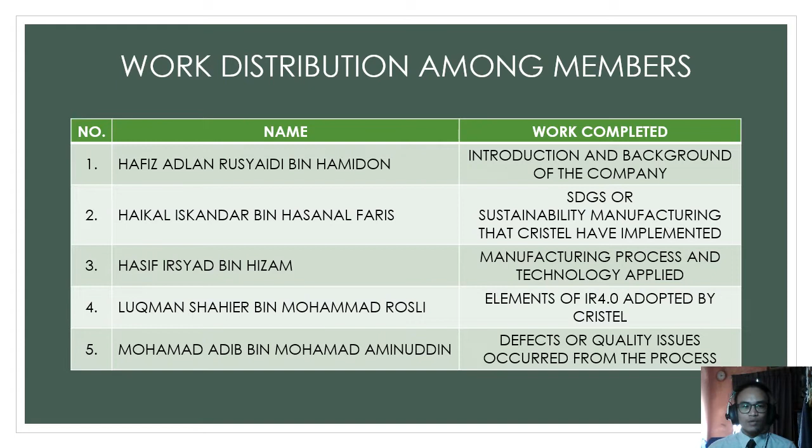Next, I would like to explain the work distribution among members. Me, Hafiz Adlan Rusyaidi have done the introduction and background of the company. Haikal Iskandar did the SDGs, or Sustainability Manufacturing, that CRISTEL company has implemented. Hasif Irsyad did manufacturing process and technology applied by the CRISTEL company. Luqman did the elements of IR 4.0 adopted by the CRISTEL company. Lastly, Mohammad did the defects or quality issues occurred from the process.

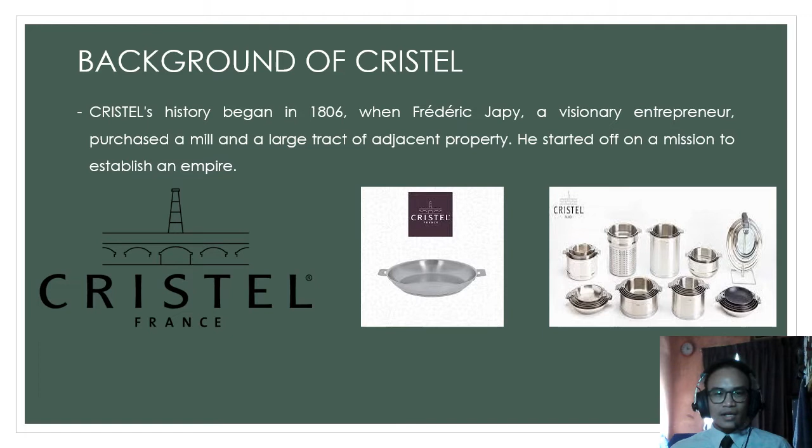First and foremost, before we start everything, we need to know the introduction and background of the company. The company that we have chosen is CRISTEL. CRISTEL's history began in 1806 when Frédéric Japy, a visionary entrepreneur, purchased a mill and a large tract of adjacent property. He started off with a mission to establish an empire. This is the logo of CRISTEL, and this too is an example of a product that CRISTEL has manufactured.

Frédéric Japy revolutionized clock production within a few years by introducing contemporary machinized procedures. He invented machines and patented them. Additionally, he organized other workshops throughout the region. Following this initial phase of rapid expansion, he rationalized his manufacturing unit and chose to make the Fesches-le-Châtel facility his flagship location. When he died in 1812, he left the company to his three sons, who helped the business expand and develop new facilities.

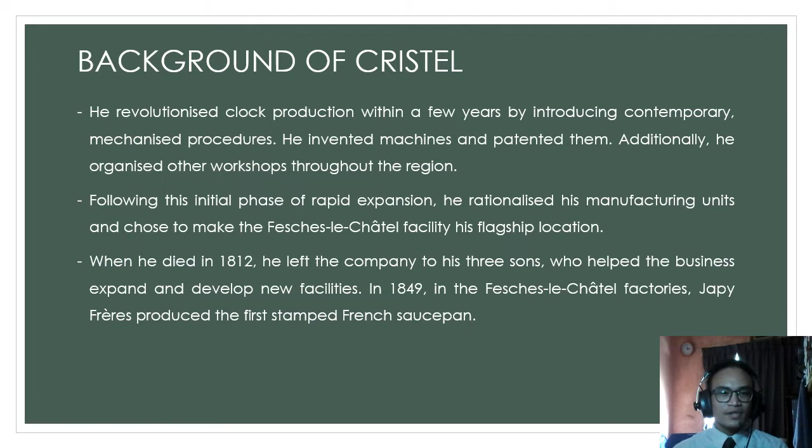In 1849, at the Fesches-le-Châtel factories, Japy Frères, produced the first stamped French saucepan. During the Second Empire, Japy grew to be France's second largest industrial enterprise. The 1880s were a golden age for this rapidly expanding company, which achieved additional success with typewriters, coffee grinders, garden furniture, and light fittings, among other products.

Since 2018, CRISTEL, the market leader in France for high-quality stainless steel cookware, has been a partner of the French Association of Master Restaurateurs, with recognized 3,800 culinary enterprises around the country.

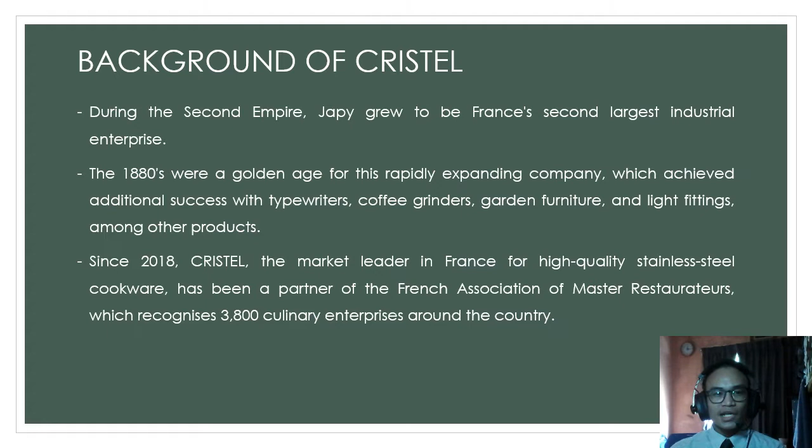CRISTEL's four primary collections are OFG (Origine France Garantie), is certified by Veritas. The raw materials utilized to manufacture CRISTEL products are of the highest quality, ensuring complete food neutrality. CRISTEL uses a non-stick coating in CRISTEL products in France, which is guaranteed to be free of PFOA. Lastly, CRISTEL has developed a line of eco-friendly professional grade cleaning products known as RENOX.

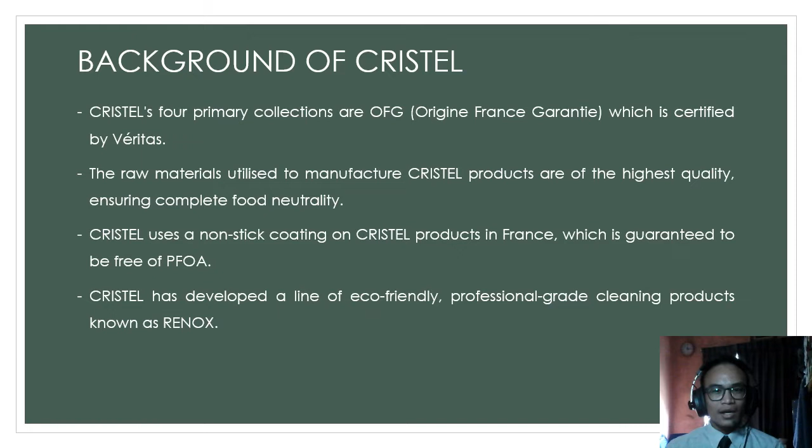Next, I would like to pass on to Hasif to explain further details on the manufacturing process of the CRISTEL company's products and the technology applied in manufacturing the product. Thank you, Adlan, for your explanation. Assalamualaikum warahmatullahi wabarakatuh, my name is Hasif. I want to continue our presentation with the manufacturing process and technology applied in this company.

For steel part production process, the first process is hot rolling. Hot rolling is a metal working process in which metal is heated above the recrystallization temperature to plastically deform it in the working or rolling operation. This process is used to create shapes with the desired geometrical dimensions and material properties while maintaining the same volume of metal.

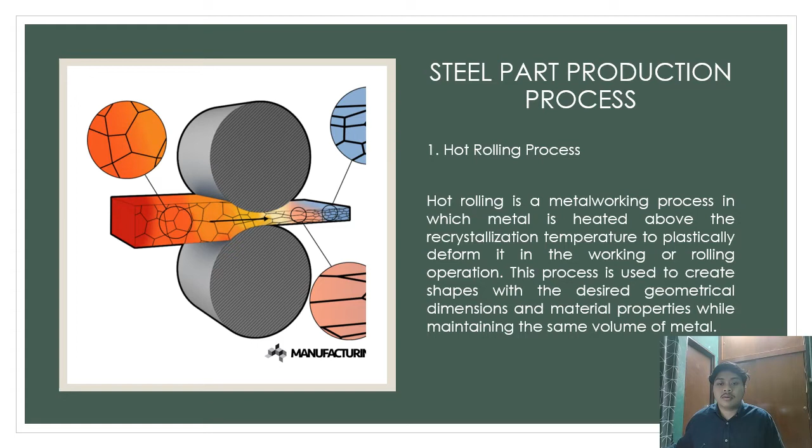The second one is the blanking process. Blanking is a steel manufacturing process in which a flat geometric shape is created by feeding a coil of sheet metal into a press and die. In this process, the blank is punched out from a large metal sheet.

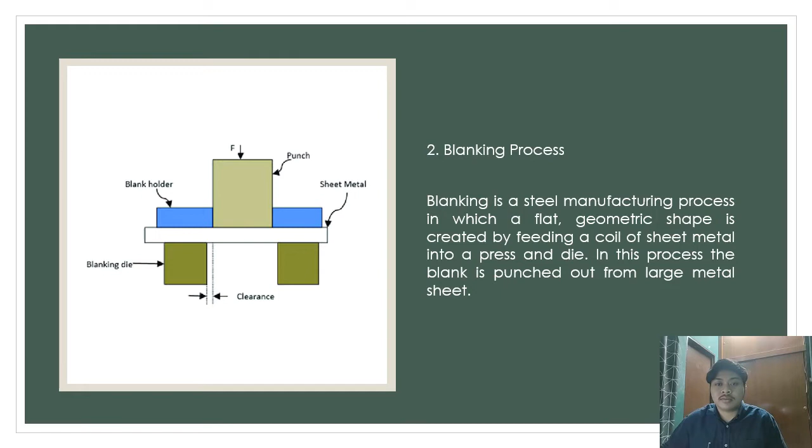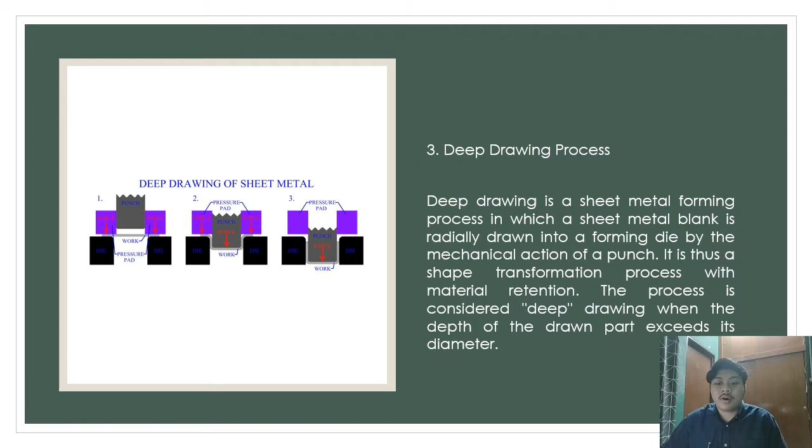For the third one is the deep drawing process. Deep drawing is a sheet metal forming process in which a sheet metal blank is radially drawn into a forming die by the mechanical action of a punch. It is thus a shape transformation process with material retention. The process is considered deep drawing when the depth of the drawn part exceeds its diameter.

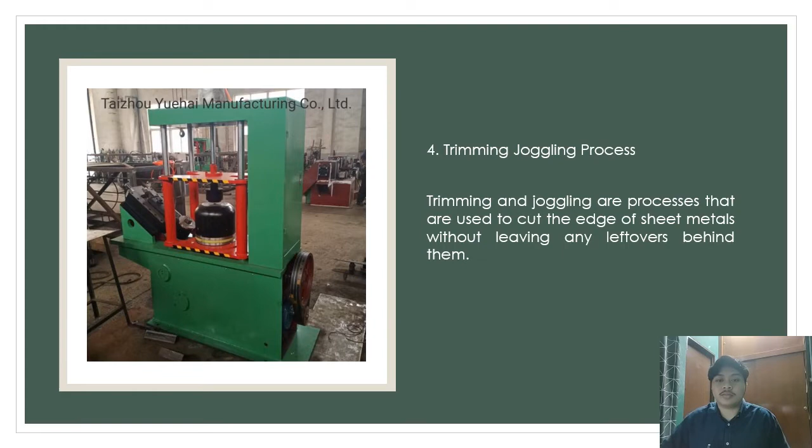The fifth process is heating. Heating is a series of industrial, thermal, and metallurgical operations used to change the physical and chemical properties of a substance. Annealing, case hardening, precipitation strengthening, tempering, carburizing, normalizing, and quenching are some of the heat treatment procedures used in metal fabrication.

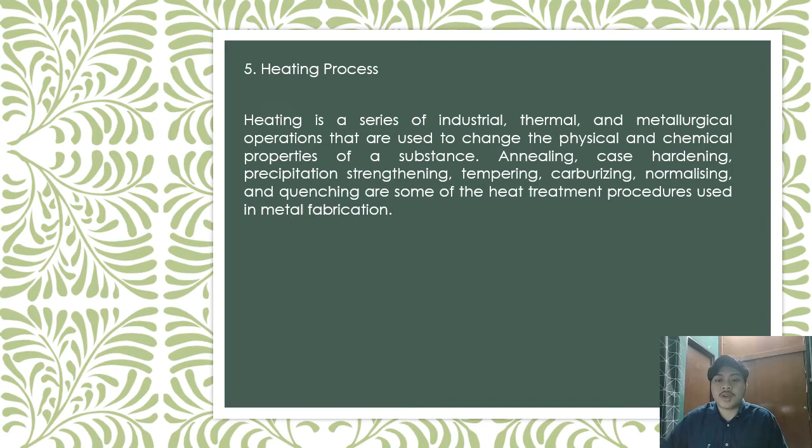Number 6 is the friction press process. Friction press is used for great forging accuracy, achieved because of the free stroke. This is the friction press machine.

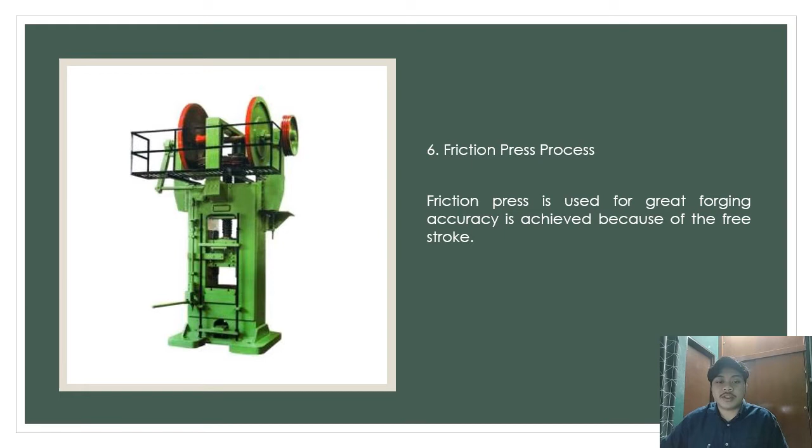Lastly, for steel part production, the process is polishing and grinding. Grinding is the first stage in the removal of mechanically attached material. Grinding is used to remove damaged or distorted surface material from a surface of the product.

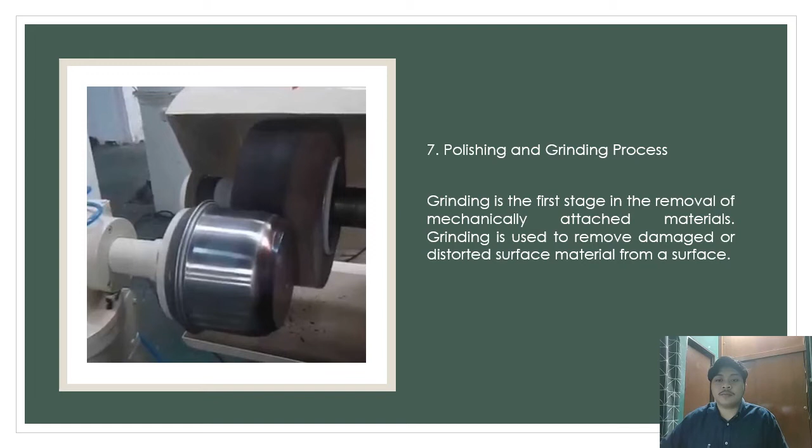For the next part is the plastic part production process. The first process is injection molding. Injection molding is a method to obtain a molded product by injecting plastic material, molten by heat, into a mold, then cooling and solidifying it.

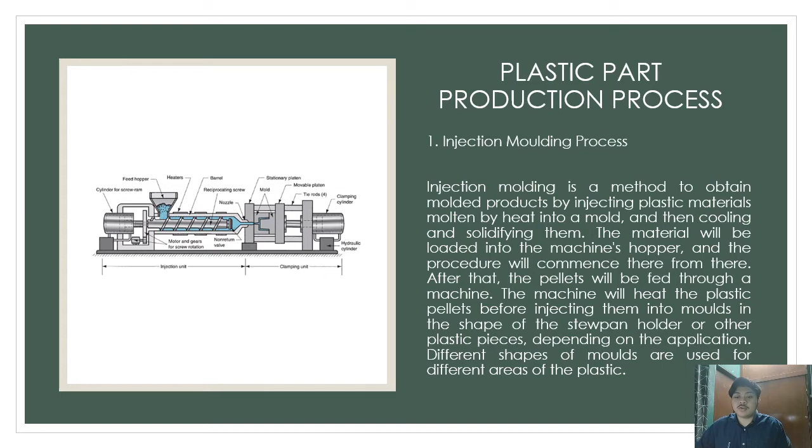The material will be loaded into the machine hopper and the procedure will commence from there. After that, the pellets will be fed through the machine. The machine will heat the plastic pellets before injecting them into a mold in the shape of a stewpan holder or other plastic pieces, depending on the application. Different shapes of molds are used for different areas of the plastic.

The last part is the riveting process. Riveting is a forging process that may be used to join parts together by way of a metal part called a rivet. The rivet acts to join the parts through adjacent surfaces. A rivet can withstand higher temperatures that can burn grime onto or near the rivet head.

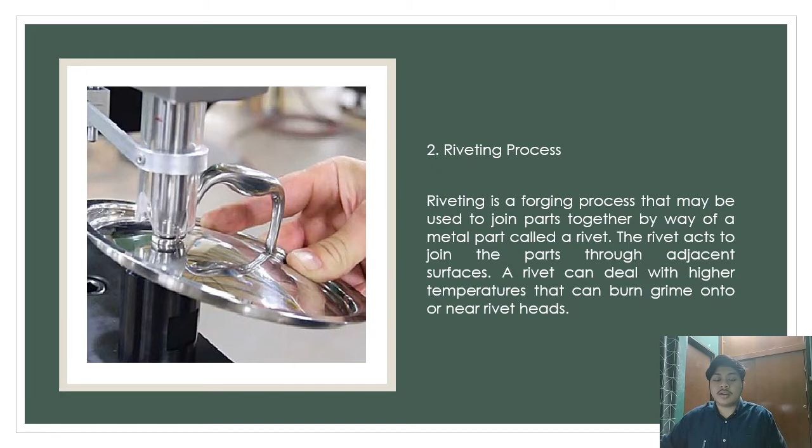So that's all from me for explaining the manufacturing process and technology applied in this company. Thank you.

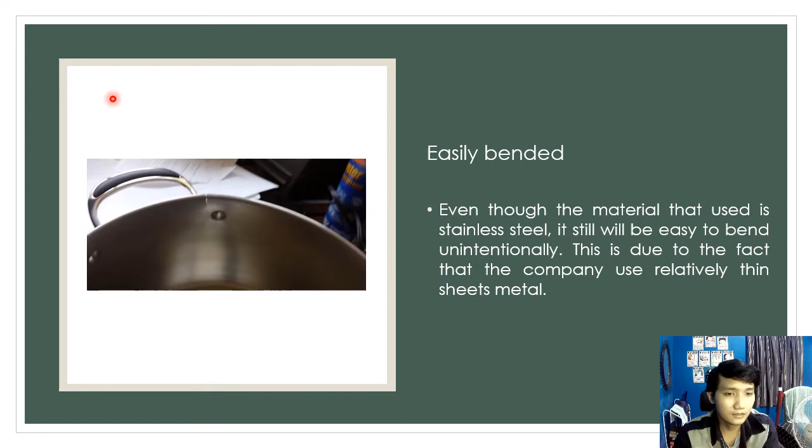The first defect we can find in this product occurs during the hot rolling process. Surface imperfections on strips during the hot rolling process can have a significant impact on the rolled product quality. On continuous casting slabs, there are early faults that spread and are inherited from those on the surface of rolled steels during upstream rolling processes.

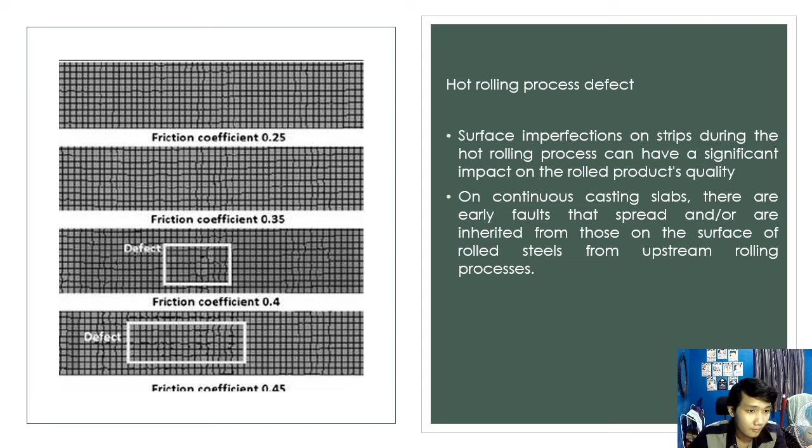As you can see from the picture, when the friction coefficient increases, the defects appear more and more. As you can see from the picture, this is the defect.

For the blanking process, the defects that can occur are scratches, rolling marks, and scoring. The plate will be damaged when dragging it back and forth on the lower mold, and this kind of scratch is deep and not easy to polish off.

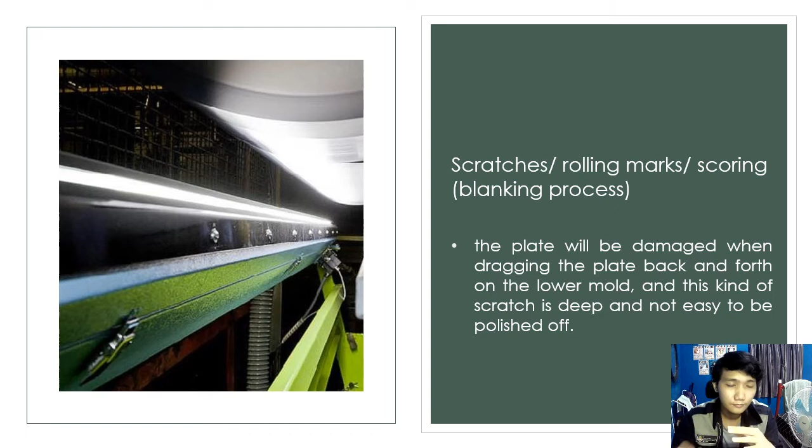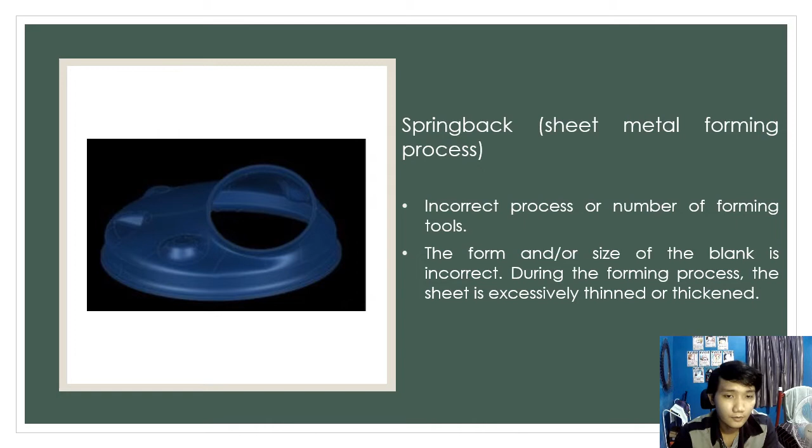Another defect that can be found is springback from the sheet metal forming process. It is caused by an incorrect process or number of forming tools. Another cause can be that the form and size of the blank is incorrect. During the forming process, the sheet becomes excessively thin or thickened.

For the heating process, the defects that can happen are overheating and burning. Improper hot working of low alloy steel reduces the ductility of materials, with faceted fracture surfaces and rendering them unsuitable for practical application. As shown in the picture, it demonstrates that the ductility of the materials will reduce when overheating occurs.

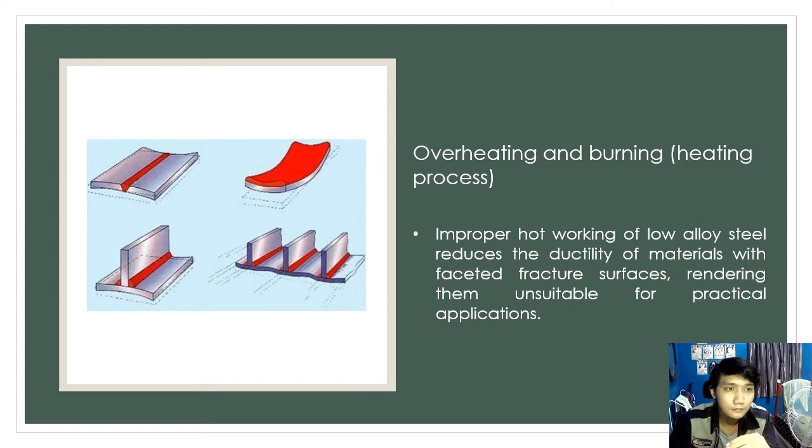For the friction process, the defect that can occur is hooking. Hooking defect creates a crack initiation and therefore reduces the fatigue resistance. Hooking is a defect that is more likely to occur in friction stir welded lap joints. It appears exclusively in the TMAZ next to the weld nugget and may not present in the HAZ where no plastic deformation exists.

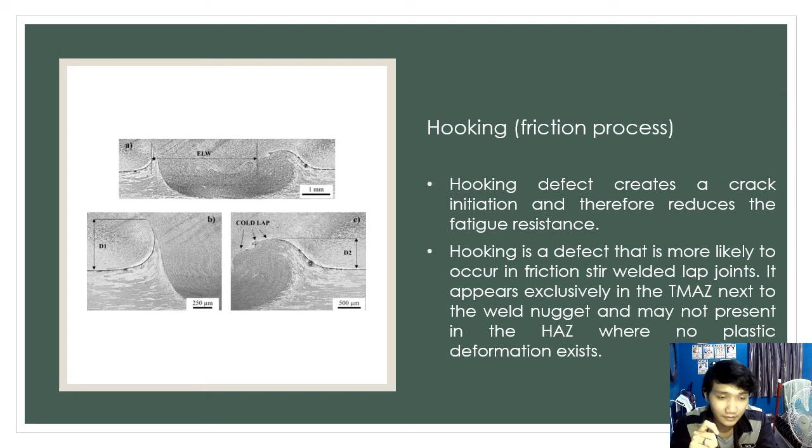For the grinding process, the defect that can occur is grinding chatter. It is caused by the wheel grading too hard, wheel out of balance, and wheel out of round. As you can see from the picture, that is the defect grinding chatter.

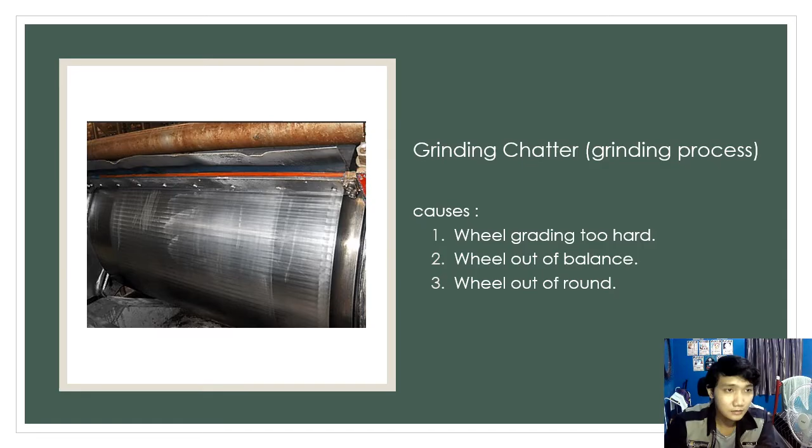So the first one is simulation. Simulation is basically a software or device to simulate the layout of products even before it's done or produced. For this company, Cristel, the company uses simulation to map out the whole factory to ensure their layouts are properly placed and can confirm 100% efficiency when doing their products, because the product has to go from one process to the other, and by using simulation we can do that transition smoothly. They also use simulation to render or make a 3D model of their products to ensure they can test it in the simulation, ensuring usability is fine before even producing it.

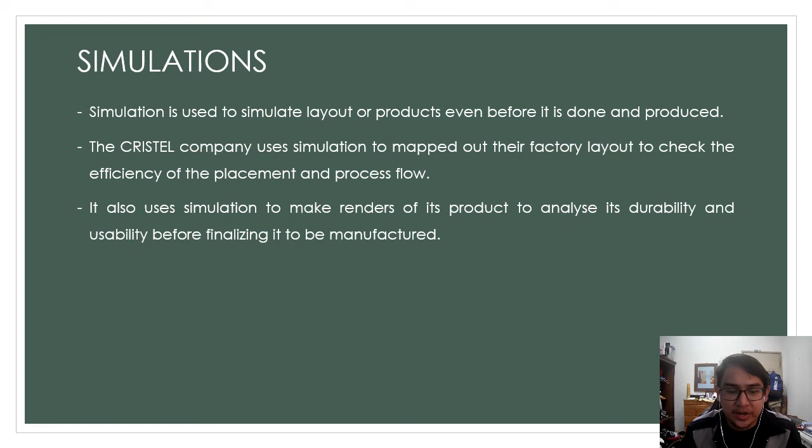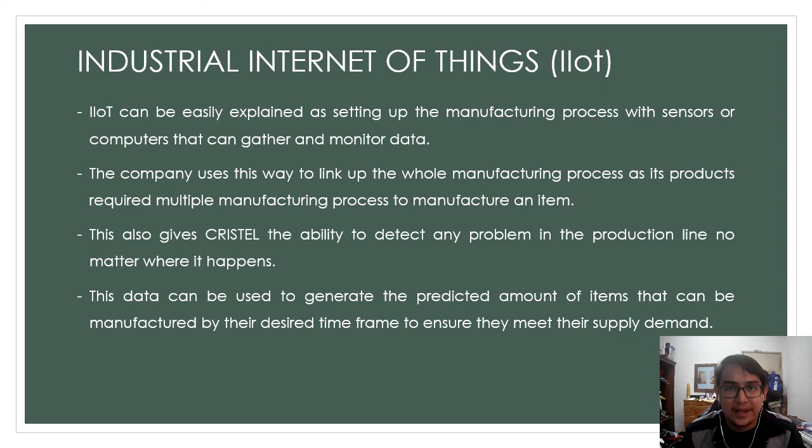So lastly is artificial intelligence, AI. Nowadays, most people know what AI is, but basically it's a program that is fed data, and from that data, the program encodes it and learns from the data, predicting its every move. The program can act like a human, meaning it can learn and give output from the data that was given.

For Cristel, they use AI to detect possible defects that will happen on their products, because when we feed the AI data about how the process is made, what the material is, what the dimension is, the AI can calculate the potential percentage of defects, or what kinds of defects will be happening on the products that the human eye cannot see. This is beneficial because it can detect the defect much earlier, even before the manufacturing process begins, so the problem can be resolved before it happens.

AI is also used by the factory to ensure safety, meaning it will be fed data on how the company enforces safety in the factory, so the workers can work safely as the AI learns and gives output on how good the safety is in the factory, and how well workers can work without having any injury. So that is for me. Thank you.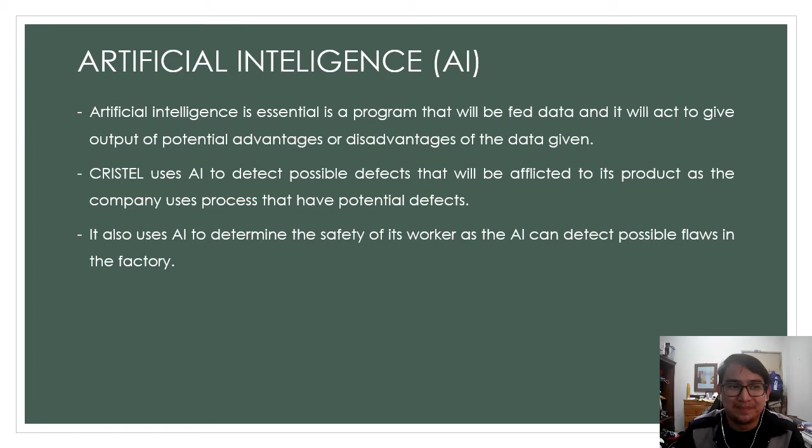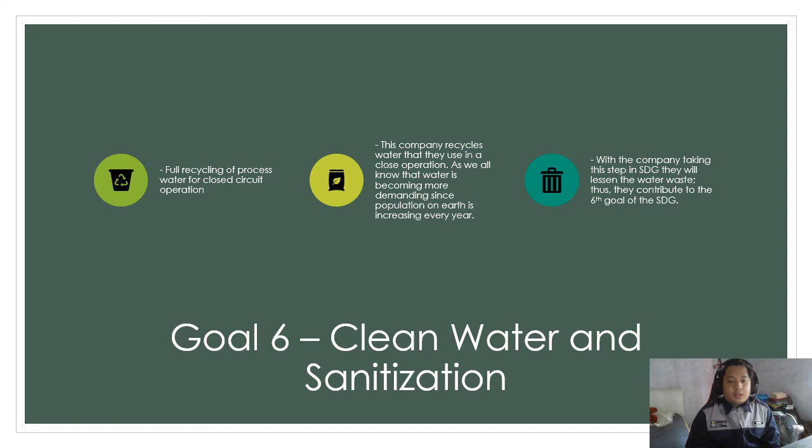So for Goal 6, Clean Water and Sanitization, CRISTEL stated that they fully recycled the process water for any process that uses water, for closed circuit operation. Meaning, as we all know, in this era water has been a very high demand thing. So with CRISTEL taking this step in the SDG, they will lessen water waste. Thus they contribute to the sixth goal of the SDG, meaning they will not consume as much water, so that other people from the community and the world can use water also.

Next up is Goal 8, Decent Work and Economic Growth. The company contributes to the eighth goal by providing a lifetime warranty, guaranteeing that their product is for life against all manufacturing defects. A good company with great work ethics will always guarantee that their product is manufactured to be the best. By creating such a high quality product, the company can export it to other countries, thus increasing their economic growth.

Next is Goal 11, Sustainable Cities and Communities. This company emphasizes energy consumption as well as extraction, transformation, and transport, meaning they are very particular on their energy consumption. They really save their energy here. Why on extraction, transformation, and transport? For example, they don't use many vehicles to transport their goods, meaning they have a very good schedule so that not many vehicles are used during transportation. With the reduction in vehicles, they reduce CO2 emissions and other related pollutions, thus curing the air and decreasing air pollution.

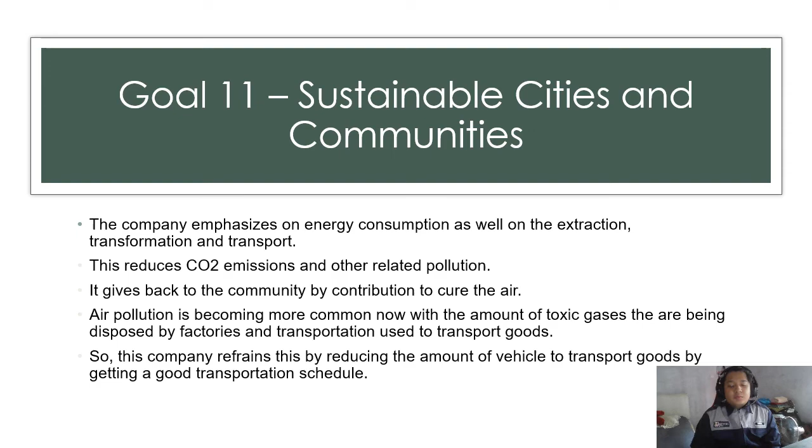For Goal 12, Responsible Consumption and Production, this company is very particular about their material and also where they dispose of their products. On their consumption, it is stated that 100% of their documents are printed on PEFC paper, ensuring in particular the sustainable management of forest resources. Meaning, their documents use paper that has a PEFC certificate. PEFC is products that come from a sustainably managed forest and also a controlled recycled source, meaning they use paper made from a recycled source and also managed forest, so that less deforestation will occur, thus healing nature.

Other than that, the company also states that 100% of their electricity comes from a renewable source, meaning that they don't simply waste sources of energy. They reuse their source of energy, so that it gives back and creates sustainable manufacturing.

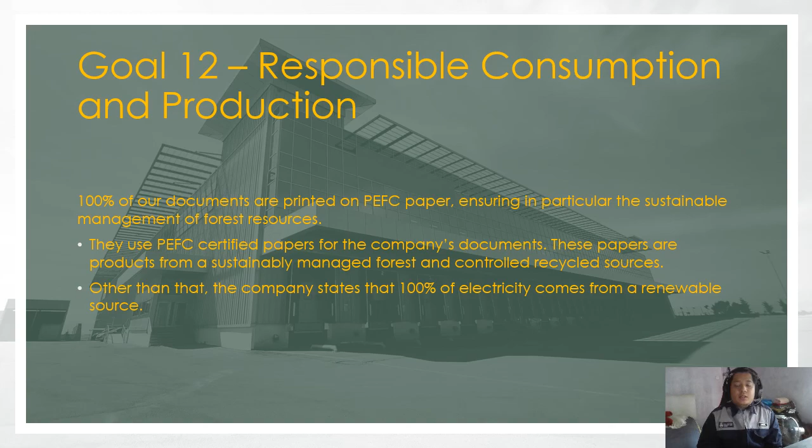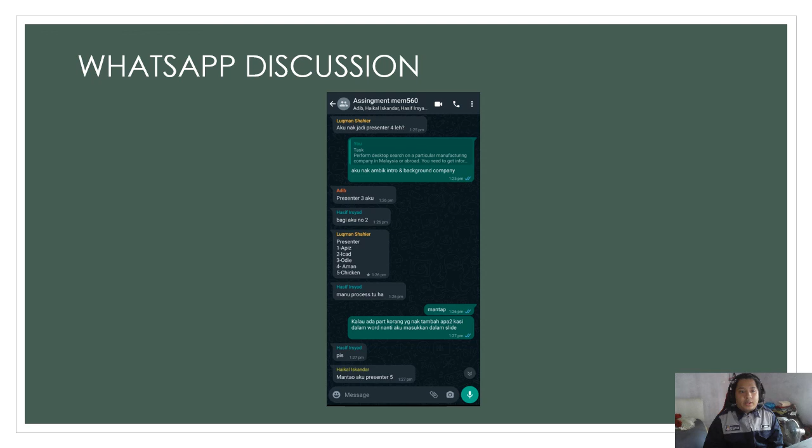Next, the evidence of our group work activity - we had discussed on two different platforms. The first one is WhatsApp discussion, where we discussed when to meet and what work distribution had been done. The other one is Discord discussion, where we discussed a more thorough part of the project and assignment, so that we understand better the company we had studied.